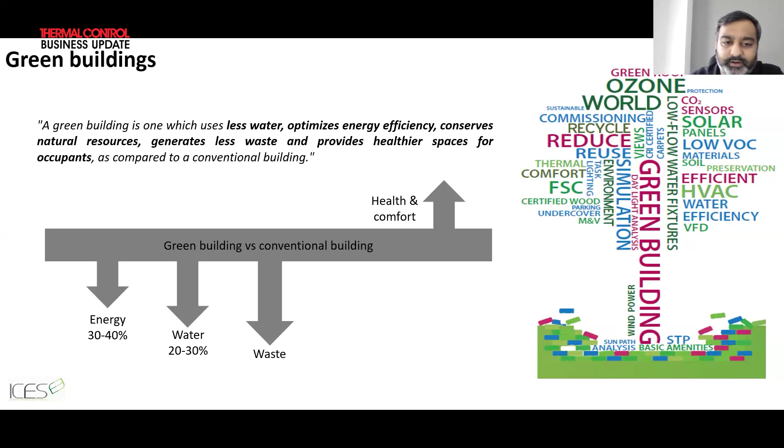Everybody knows it's a building which basically saves energy and water, reduces waste, and gives better health and comfort for the occupants. Any green building rating system, be it IGBC, GRIHA, EDGE, or LEED, revolves mainly around sustainable design, site selection, water efficiency, energy, sustainable materials, indoor air quality, and of course, innovations.

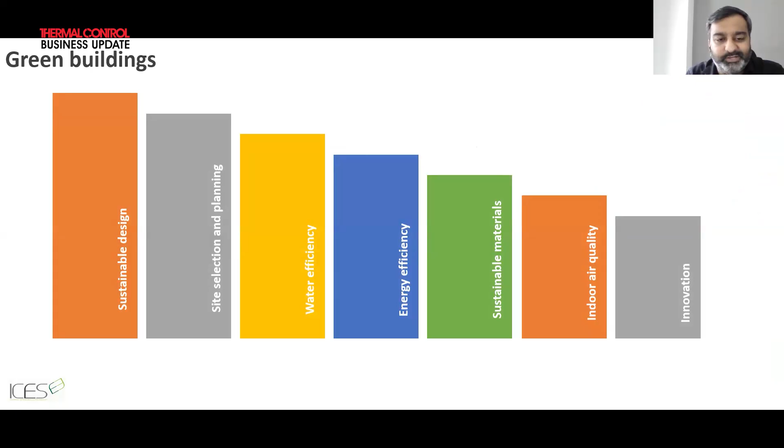We'll not go into green building details a lot because green building is not just about certification. The other more important part, as Vikram so rightly said, is to be more sustainable in design, how to reduce the heat gains, and how we can construct sustainable buildings in the true sense.

So we truly believe that the first point is reduced demand: if we do not need it, we should not build it. There's no point in installing a 2 ton air conditioning where it can be done by 1 ton, which can definitely be done by design optimization, and efficient operations and maintenance are an important part of it.

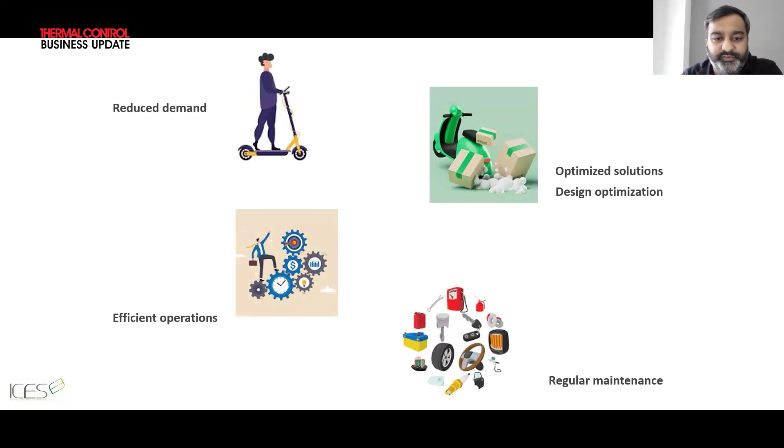As we say roti kapda makan in India, we should eat as per our climatic conditions. We should wear clothes as per our climatic conditions. Clothes in the south are different than the north. Similarly, east is different than west. Similarly, the buildings also have to be different.

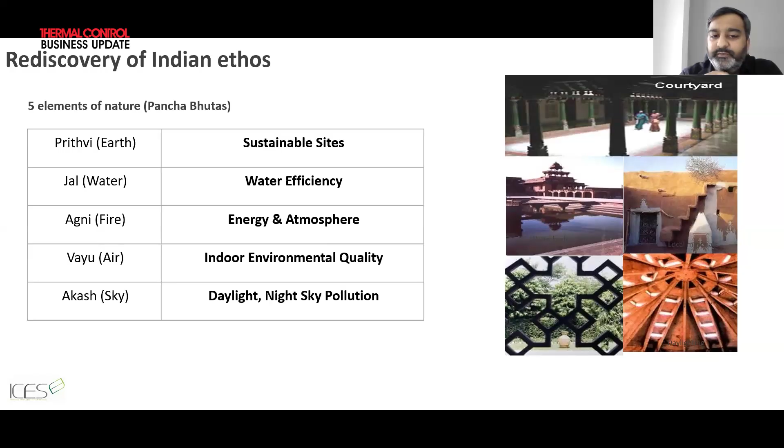But unfortunately, this is the real scenario in India today. You cannot identify where each building would be. A building in Ahmedabad is similar to Bangalore, is similar to Kolkata, and also in the north. So we just have to focus on our old architecture, the Indian ethos of Prithvi, Jal, Agni, Vayu, and Akash. We were sustainable before, and I think we should focus on that.

So buildings in Rajasthan, as Vikram sir already mentioned, were constructed in a truly sustainable way before, without air conditioning. The palaces were cooler. Similarly, buildings in Haryana with open courtyards helped in maximum daylight and good ventilation. Similarly, buildings in Gujarat, Kerala. So all the buildings were different depending on their local climatic conditions.

So coming to the main part, green building is not expensive. There's a myth and perception in the market that if you construct green buildings, it is going to be an expensive affair. But that is not true. If you design and plan green buildings from day one, they are not at all expensive. In fact, there are examples where green buildings have been cheaper.

So focusing on design strategies, simulations, right material selection, good construction practices, operation and maintenance definitely helps in saving a huge amount of energy and water, and of course there are a lot of intangible benefits as well.

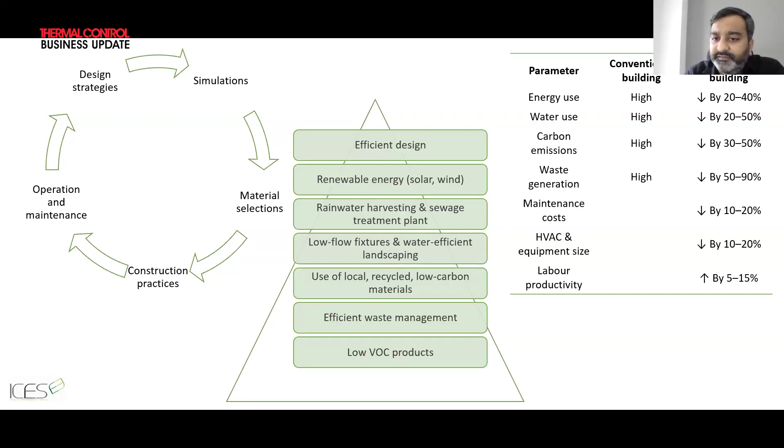So when we focus on sustainable design, as I said, we need to design as per the climatic conditions, with appropriate orientation. The longer facades should be on north and south, smaller facades on east and west, so that we can maximize the north light. We should provide shading on south facades, again reducing the heat gains, appropriate daylight and ventilation, and designs to mitigate the urban heat island effect.

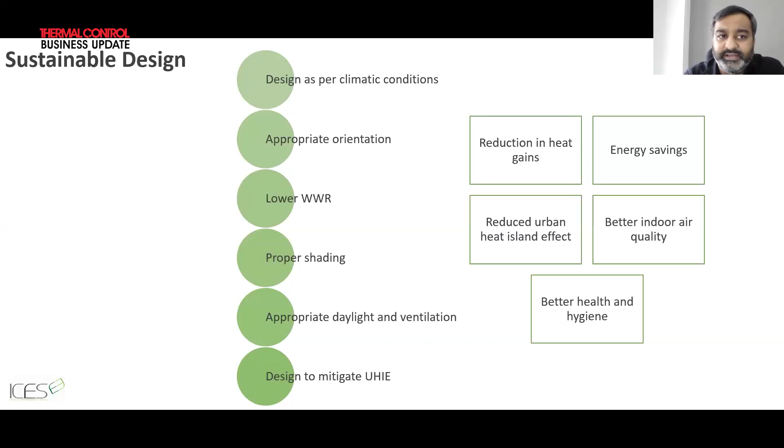So by all this, we would definitely reduce the heat gains. It helps in energy savings, better indoor quality, along with better health and hygiene. Similarly, when we talk about civil materials, if we compare red bricks and AAC blocks, AAC blocks help in saving a huge amount of steel and concrete, which definitely helps in cost savings.

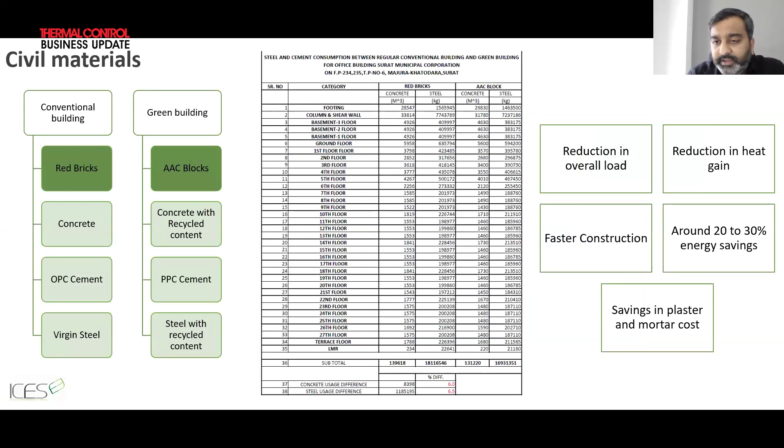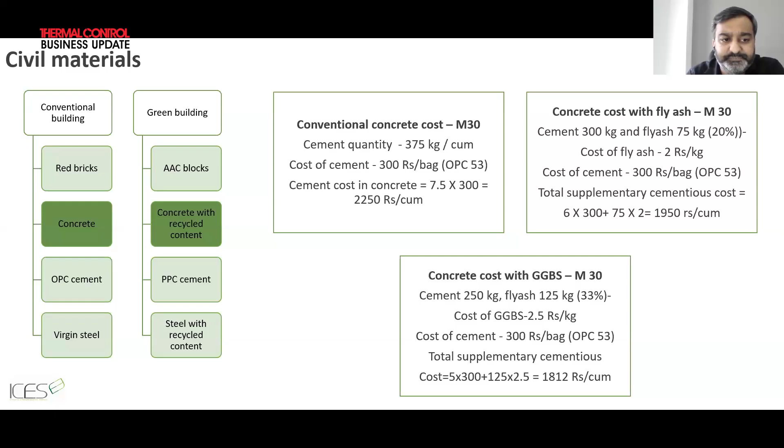Similarly, if we select conventional concrete versus concrete with, say, recycled content like fly ash or GGBS, it helps in saving again a huge amount of money over the project course. Also, in terms of OPC versus PPC cement, if we see the total life cycle cost, PPC cement, that is cement which has fly ash content, helps in saving a good amount of money.

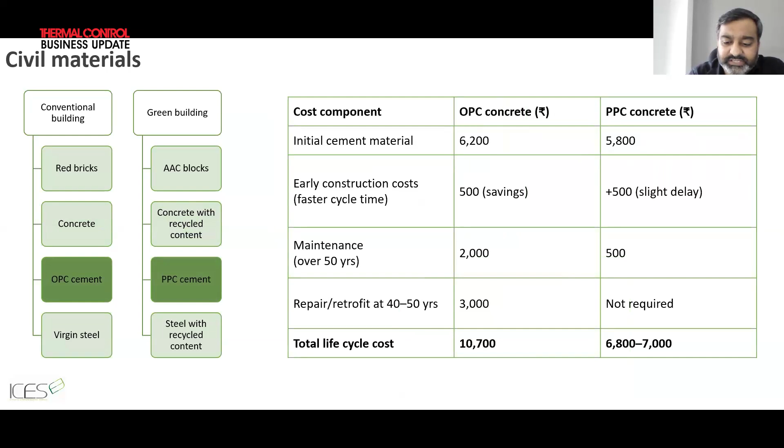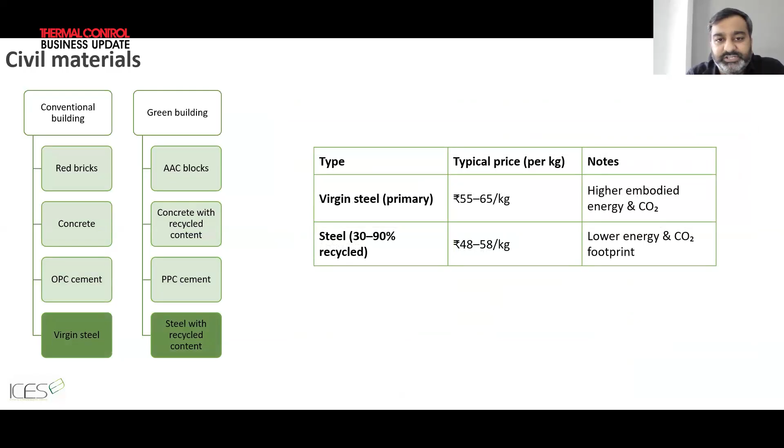Again, in green buildings or sustainable buildings, we prefer steel with recycled content as compared to virgin steel, which also helps in saving a good amount of money. So just by selecting materials accordingly, it helps in saving money during the construction stage. Similarly, HVAC and LPD as well.

So if we are constructing a green building from day one, where we have tried to reduce the heat gains, we can reduce the HVAC load as well, right? So suppose if the requirement is 1 ton in 150 square feet, that we can increase to 600 square feet as well with proper design. So there we can again cut down a huge amount in HVAC capital cost, HVAC loads, energy saving.

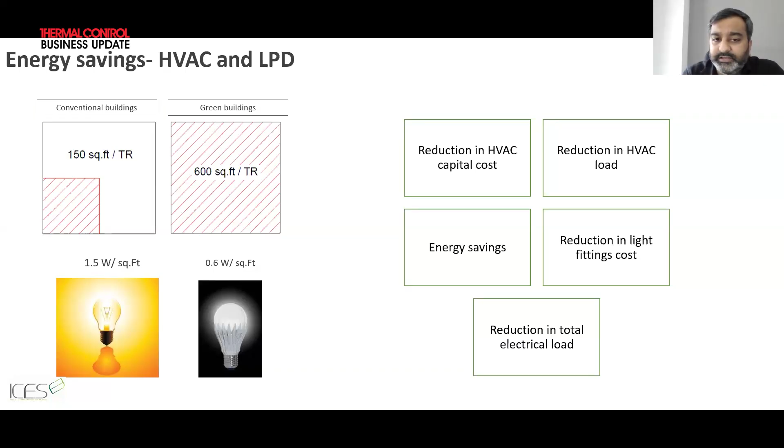Similarly, with good light selection, right from 1.5 watt per square feet to 0.6 watt per square feet in office buildings, we can reduce a good amount of electrical load and energy savings are possible. So these are again the few examples where we can save energy in terms of lighting, HVAC, pumping, even lifts. We can select energy efficient lifts as compared to normal lifts, building envelope. So these are the various aspects where electrical savings is easily possible in green buildings.

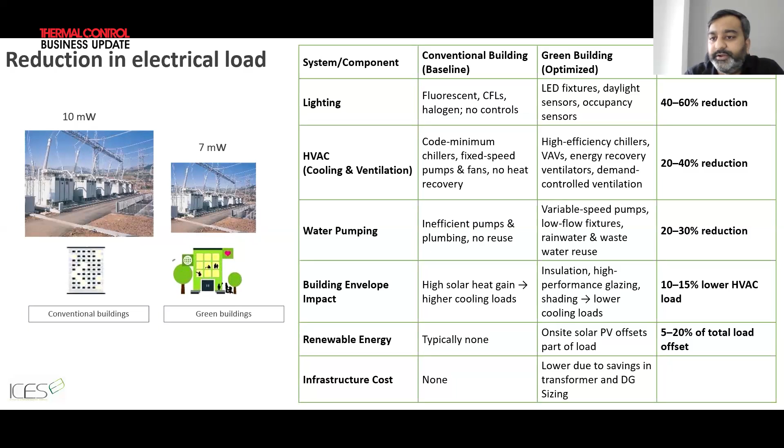So again, if we consider all those parameters and if we are able to reduce the overall requirement of a building, we can definitely save in infra cost as well, where the transformer sizing can be reduced, diesel generator sizing can be reduced, helping in overall cost.

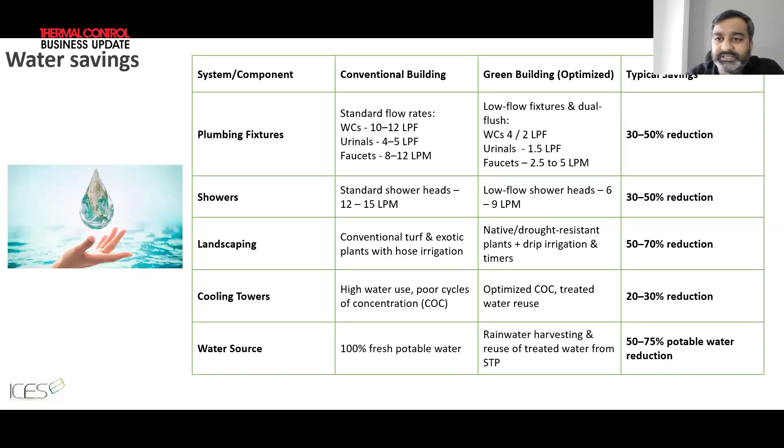Similarly, water savings is a no-brainer by selecting low-flow plumbing fixtures, planting native trees, efficient landscaping. We can save a huge amount of water. Of course, cooling towers with better optimized COC, treated water use, rainwater harvesting. So these are various water savings aspects which are explored in green buildings.

Again, generally what we have seen in these years is even though it is a green building, the underground water tank sizing or the overhead water tank sizing remains the same. So that should not be there. NBC should consider that. If a green building is saving water, the tank design and everything should be accordingly, so that you can save a good amount in infrastructure cost or the pumping cost as well.

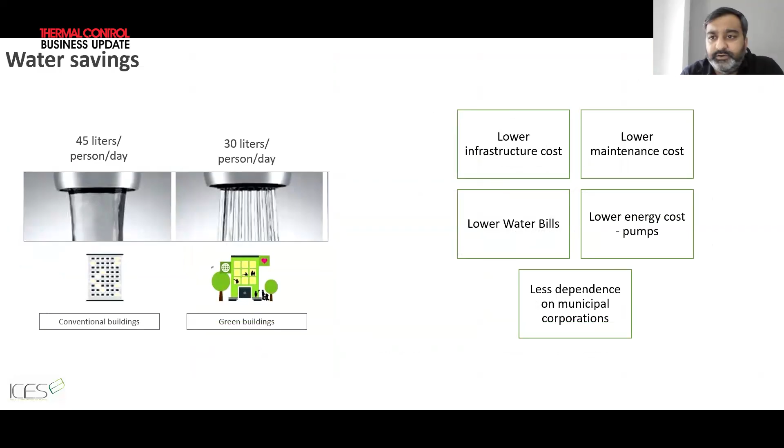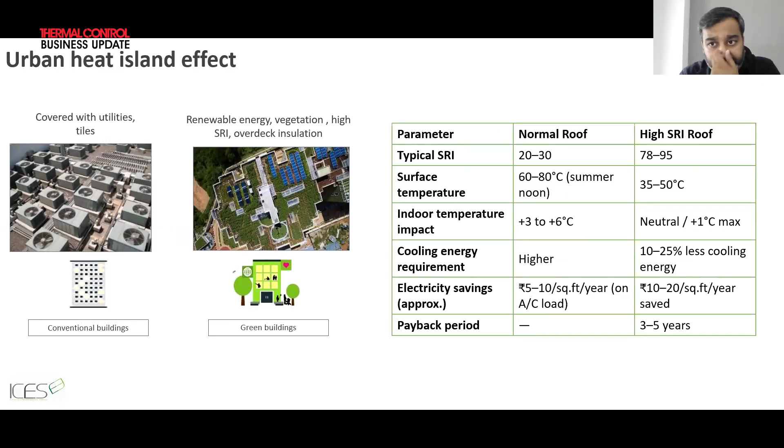One more aspect which helps in reducing heat gains is we can explore high SRI roof or roof with overdeck insulation, renewable energy, landscape, so that you can easily reduce around 5 to 10 degrees for the top floors in terms of urban heat island effect, and definitely saving in terms of heat loads as well.

Waste management as well. Generally, during construction and after construction, if you do not segregate waste properly, it eventually goes into landfill. We have seen so many cities with huge mountains of dump, right? So if waste segregation is followed properly, wet waste is converted into manure through OWC machines, it can be earning for the society or the building as well. Similarly, dry waste can be segregated and further sent to vendors rather than sending into landfills.